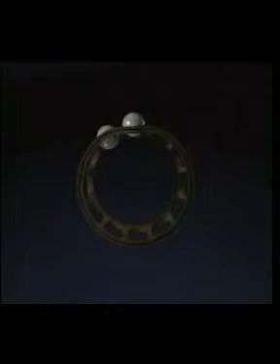This SKF training film is about single-row angular contact ball bearings. An angular contact ball bearing consists of a retaining cage and a row of balls with an inner and outer ring. The raceways are ground at a 40-degree contact angle, which means they can carry large axial loads.

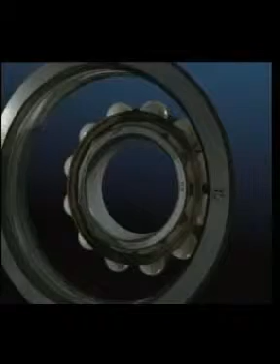Other bearings in this family are the double-row angular contact bearing, which is always arranged in a back-to-back configuration, and the four-point bearing, which can only be used for axial loads.

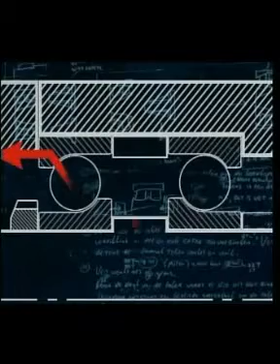Single-row angular contact ball bearings can accommodate axial loads acting in one direction, and therefore they must always be used in pairs, in face-to-face or back-to-back configuration. The resulting setup will accommodate radial and axial loads in either direction.

In cases where the axial load in one direction is high, they can also be used in a tandem arrangement. Tandem arrangements still require an opposing matching bearing to locate and support the shaft.

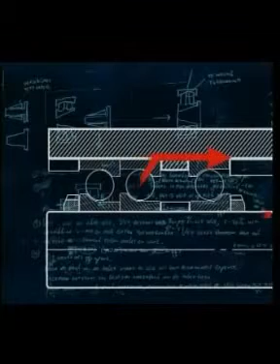When mounted in these configurations, the clearance in the bearing is predetermined during manufacture and is indicated by the suffixes on the bearing designation. Various degrees of clearance or preload are available to suit different application requirements. The wrong configuration could cause severe damage to the equipment.

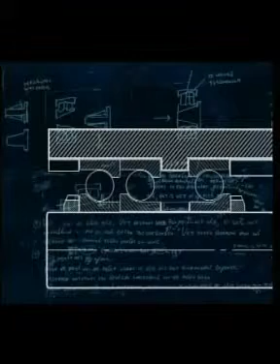Angular contact ball bearings are commonly used in applications like gearboxes, pumps, and machine tool applications, where high accuracy, speed, and axial loads are present. This film shows the mounting for a back-to-back arrangement.

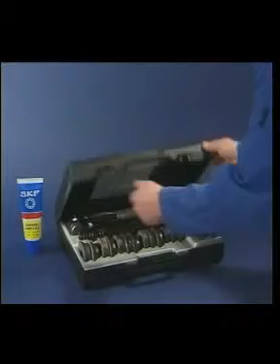The most common way of mounting small angular contact ball bearings is in a cold condition using the SKF fitting toolkit. Always keep the bearing in its protective package until the actual mounting starts and use some light oil on the shaft.

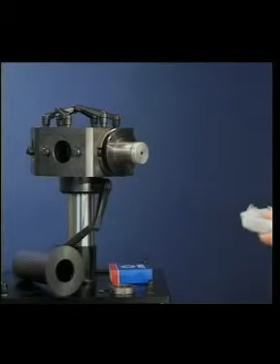The fitting tool kit is designed to drive the inner and outer ring at the same time onto the shaft. This avoids potential fitting damage to the bearing by ensuring the shock loads are not passing through the loose ring.

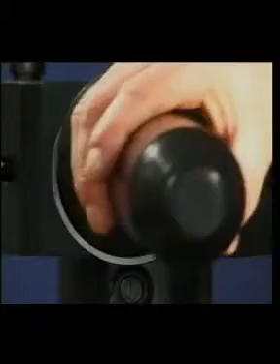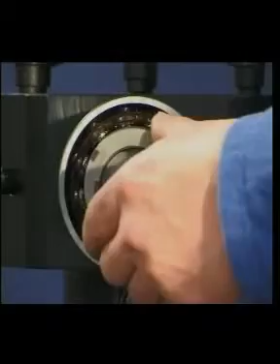When both bearings have been mounted in the correct configuration, they're secured on the shaft by the lock nut.

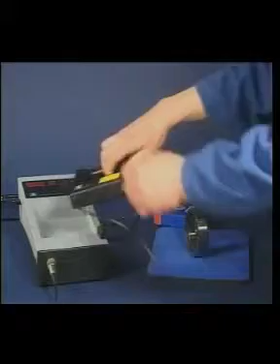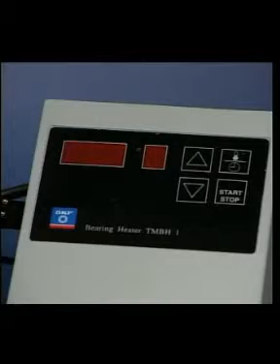Another common method to mount angular contact ball bearings is with heat. SKF supplies a wide range of bearing induction heaters for this purpose. In this instance, the small TMBH 1 induction heater is used. Do not heat the bearing above 110 degrees centigrade and always use protective gloves.

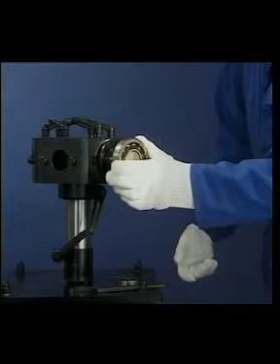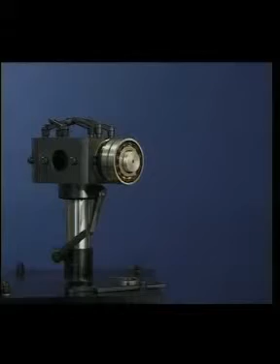After the bearings are mounted, secure them on the shaft with the lock nut. Take care that the bearings have cooled down before fitting into the housing.

To dismount angular contact ball bearings, first remove the lock nut. The most common method to remove the bearings from the shaft is to use a mechanical puller.

This application has been designed with a backing ring, ensuring that the puller force is transferred through the ring with the interference fit.

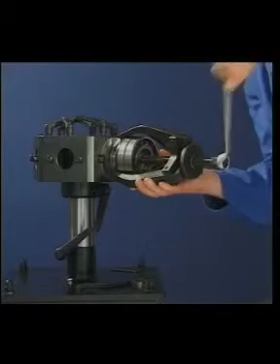When cold mounting angular contact ball bearings, always ensure the inner and outer rings are simultaneously driven onto the shaft. To put the force on the non-locating ring would result in the shock load being transmitted through the rolling elements and cause damage to the bearing.

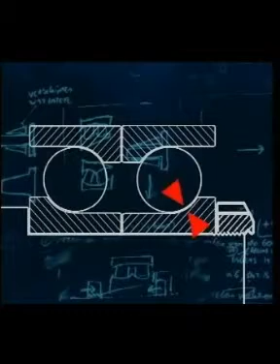SKF manufactures a complete range of pre-adjusted bearings which, when used as pairs, will ensure the correct amount of clearance or preload is achieved. It's very important to check the application manual for the correct setup information.